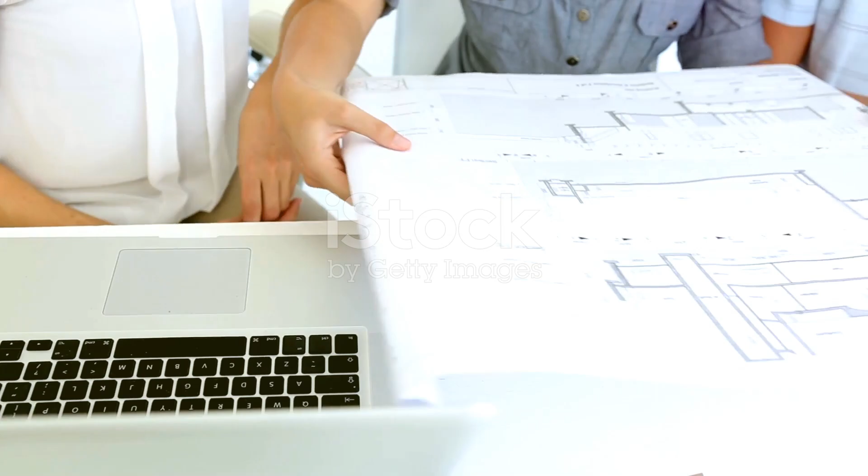Architecture is more than just constructing buildings. It is about shaping spaces that we live, work, and interact with every day. At the heart of this creative process lies the concept of form. Form refers to the shape, volume, and mass of a building, defining its visual presence and influencing how we perceive and experience the space. Architects mold and manipulate form to create buildings that are not only aesthetically pleasing but also

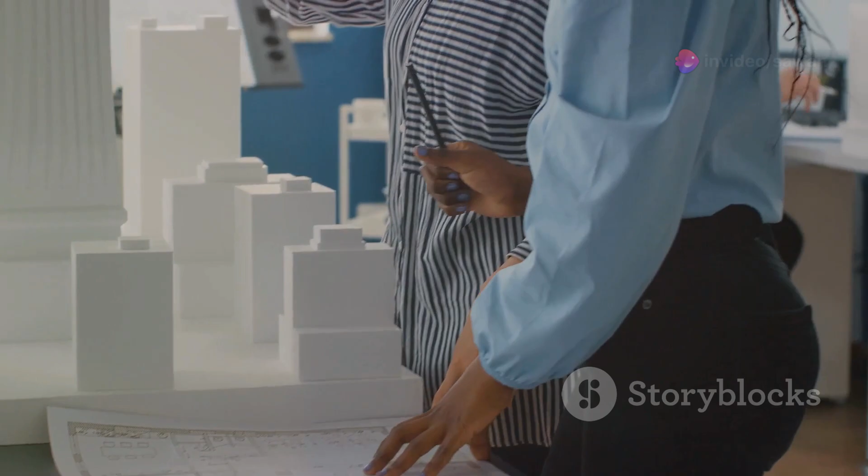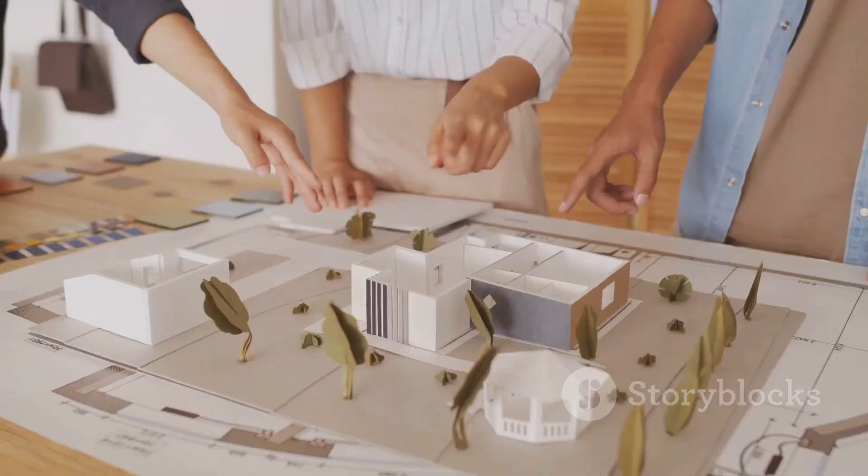functional and meaningful. From the soaring arches of Gothic cathedrals to the sleek curves of modern skyscrapers, form plays a crucial role in shaping our built environment. It can evoke emotions, convey ideas, and even challenge our perceptions of space. Think about the awe-inspiring presence of a grand mosque or the sense of tranquility you feel within a Japanese rock garden. These experiences are all influenced by the skillful manipulation of form by architects and designers.

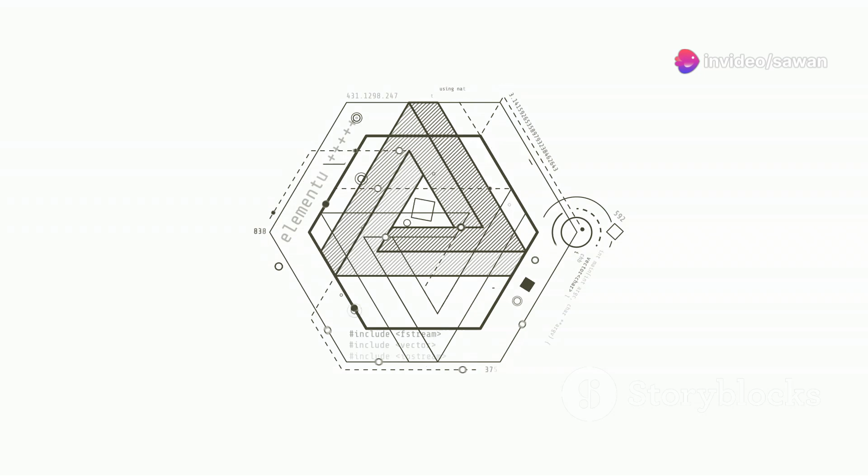Understanding the principles of form is essential for anyone interested in architecture. It allows us to appreciate the thought and intention behind the buildings we encounter. By exploring the different geometric shapes, transformations, and design techniques that architects employ, we gain a deeper understanding of the language of architecture and how it shapes our world.

This journey into the world of architectural form will unravel the secrets behind iconic structures and inspire us to look at our built environment with a fresh perspective. Let's delve into the fundamental elements that form the foundation of architectural design.

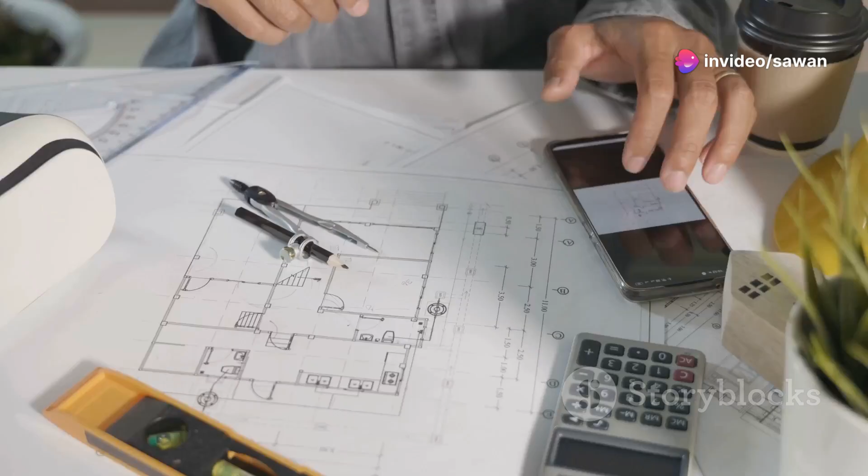Just as a sculptor starts with a block of clay, architects begin with basic geometric forms. These simple shapes serve as the foundation for more complex designs, providing a framework for creativity and structural integrity. By understanding the properties of these forms, architects can manipulate them to create a wide range of architectural styles and expressions.

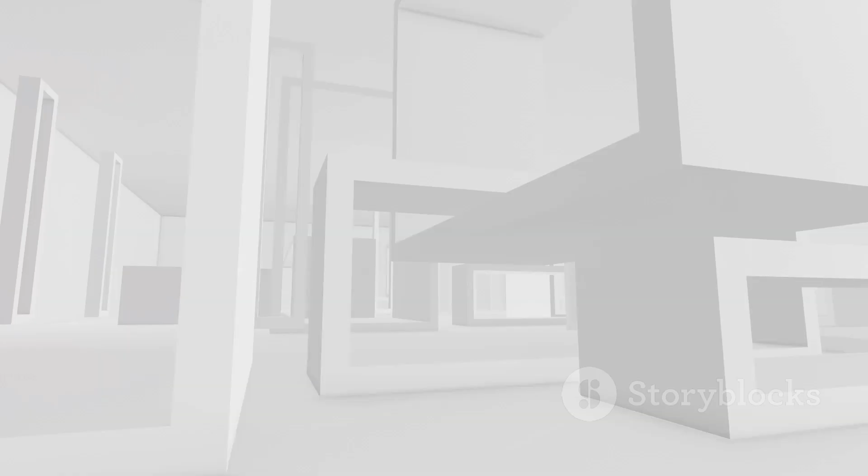The cube, with its 6 equal sides and a sense of stability, is often used to convey strength and simplicity. Think of the minimalist homes with their clean lines and open spaces, or the imposing presence of ancient Egyptian temples. The sphere, on the other hand, represents unity and completeness. Its curved surface is often used to create a sense of harmony and flow, as seen in the geodesic domes of Buckminster Fuller or the Pantheon in Rome.

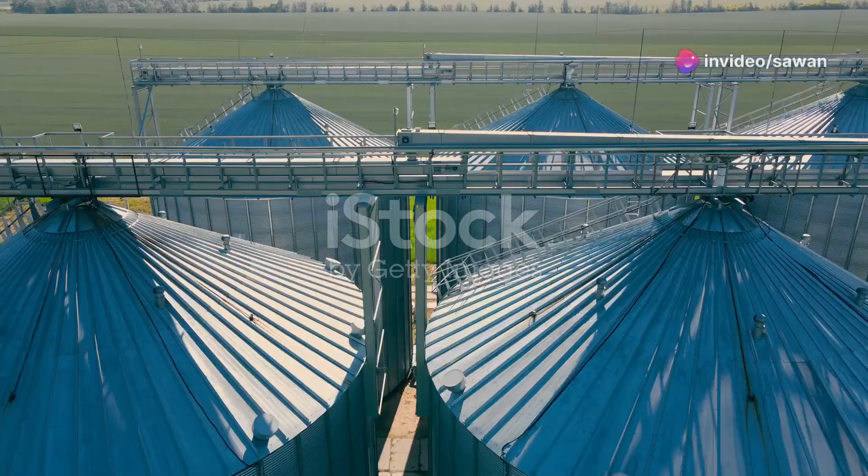Moving on to forms with more dynamic qualities, we have the cylinder and the cone. The cylinder, with its circular base and vertical sides, is often used to create a sense of verticality and movement. Think of the towering silos in industrial areas or the columns that grace classical buildings. The cone, with its sloping sides converging to a point, is often associated with direction and focus. The iconic shape of a teepee or the spire of a church steeple immediately draws the eye upwards.

Finally, we have the pyramid and the prism. The pyramid, with its triangular faces converging to a point, evokes a sense of grandeur and monumentality as seen in the ancient pyramids of Egypt and Mexico. The prism, with its 2 identical bases and rectangular sides, offers a versatile form that can be elongated, rotated, or combined to create dynamic and complex designs.

These basic geometric forms provide the building blocks for more elaborate designs. Architects skillfully combine, transform, and manipulate these forms to create structures that are both functional and visually compelling. In the following sections, we'll explore the various techniques architects employ to breathe life and character into these fundamental forms.

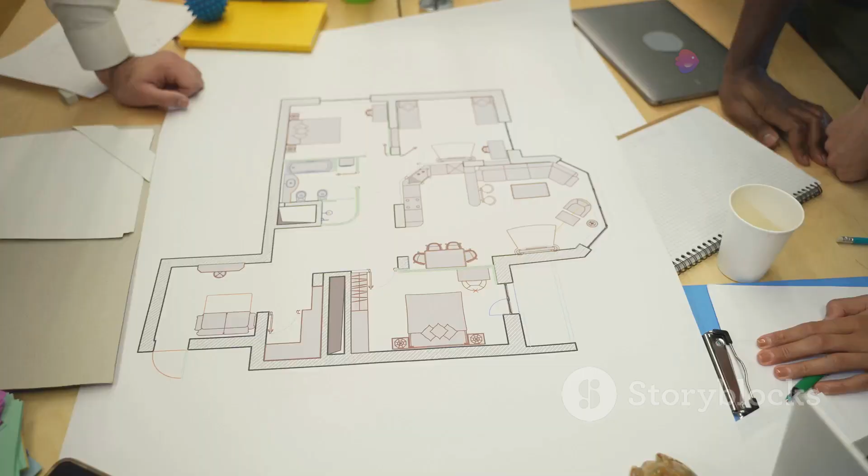Architects rarely use basic geometric forms in their raw state. Instead, they employ a range of transformations to create more complex and interesting designs. One of the most fundamental techniques is additive transformation, which involves adding elements to an existing form. This can be done in several ways, each resulting in a unique architectural expression.

One common approach is linear addition. This involves adding forms along a straight line, creating a sense of direction and movement. Think of a row of terraced houses or a skyscraper with repeating floors. Each element adds to the overall composition, creating a rhythm and flow that guides the eye.

Radial addition, on the other hand, involves adding forms around a central point. This technique is often used to create a sense of expansion and dynamism. Think of the Guggenheim Museum in New York, where a spiral ramp winds its way around a central atrium. The radial arrangement of the galleries creates a unique spatial experience as visitors ascend through the building.

Clustered addition offers another approach to additive transformation. This technique involves grouping similar or different forms together to create a more complex and organic whole.

Think of a traditional village where houses are clustered around a central square, or a modern university campus where buildings are arranged in a more organic and interconnected way. Additive transformations allow architects to create dynamic and engaging spaces by combining simple forms into more complex compositions. By carefully considering the arrangement and relationship between different elements, architects can manipulate the flow of space, create visual interest, and evoke a range of emotions in the observer.

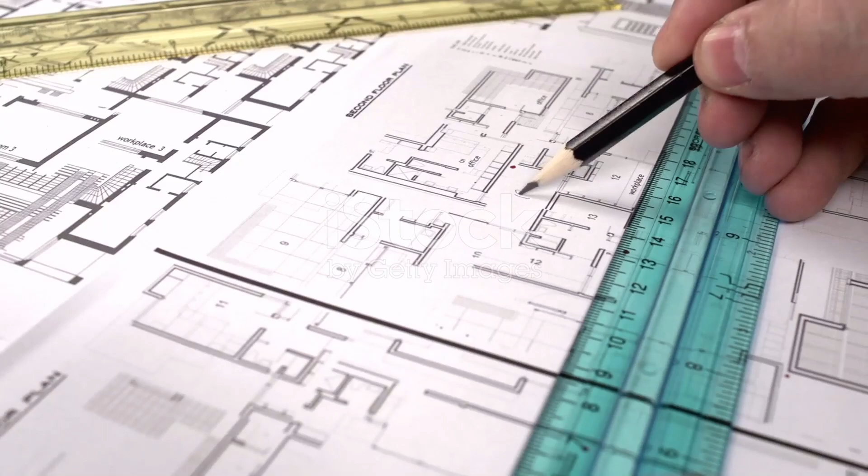Section 4: an in-depth look at dimensional transformations, stretching, compressing, or expanding forms. Dimensional transformation is another powerful tool in the architect's arsenal. This technique involves manipulating the dimensions of a form, stretching, compressing, or expanding it to create new and exciting shapes. By playing with the height, width, and depth of a building, architects can challenge our perceptions of space and create a sense of drama and intrigue.

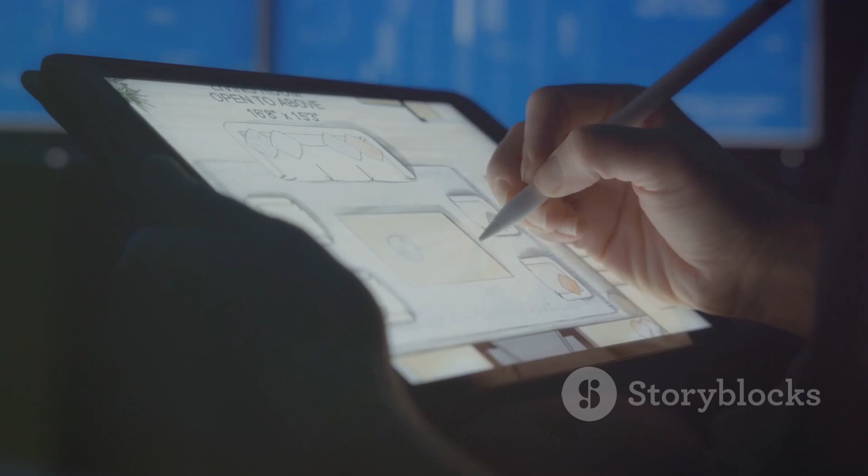Stretching a form involves elongating one or more of its dimensions. This can create a sense of elegance and verticality, as seen in the soaring skyscrapers of Manhattan or the slender columns of a Gothic cathedral. The emphasis on height draws the eye upwards, creating a sense of awe and grandeur.

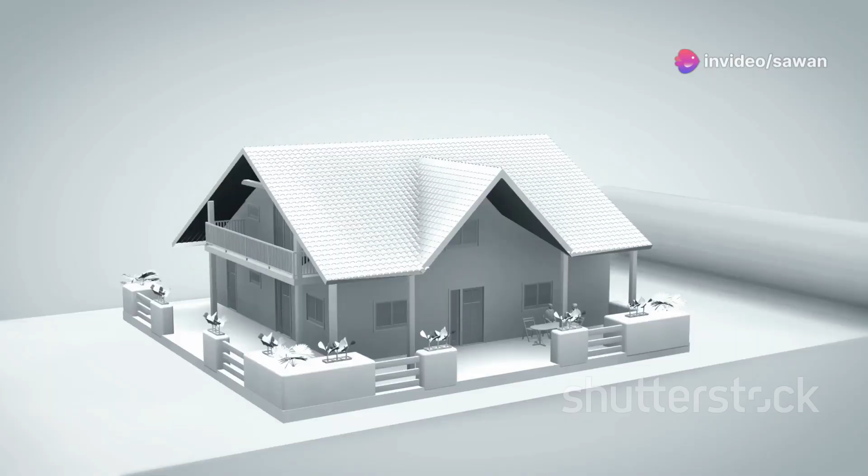Compression, on the other hand, involves squeezing or shortening a form. This can create a sense of intimacy or solidity, depending on the context. Think of a cozy cabin nestled in the woods, or a fortress with its thick walls and compact design. The compressed form conveys a sense of strength and security.

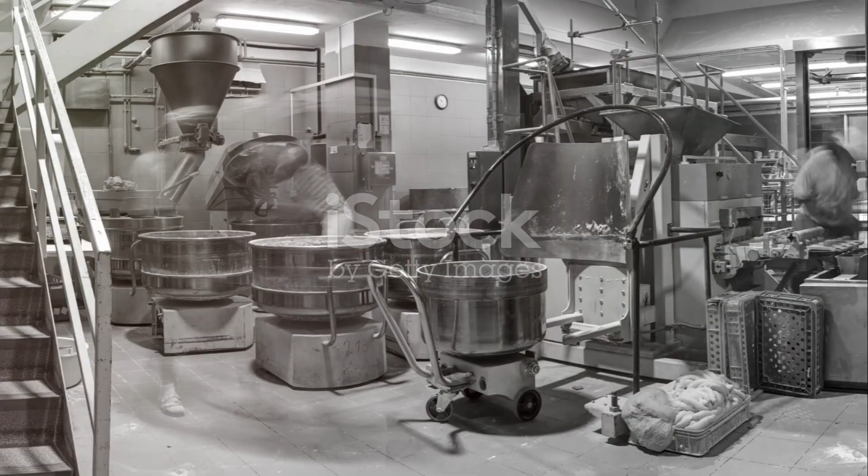Expanding a form involves enlarging it in all dimensions. This can create a sense of openness and grandeur, as seen in the vast atriums of modern shopping malls or the expansive halls of grand palaces. The expanded space invites exploration and creates a sense of freedom and possibility.

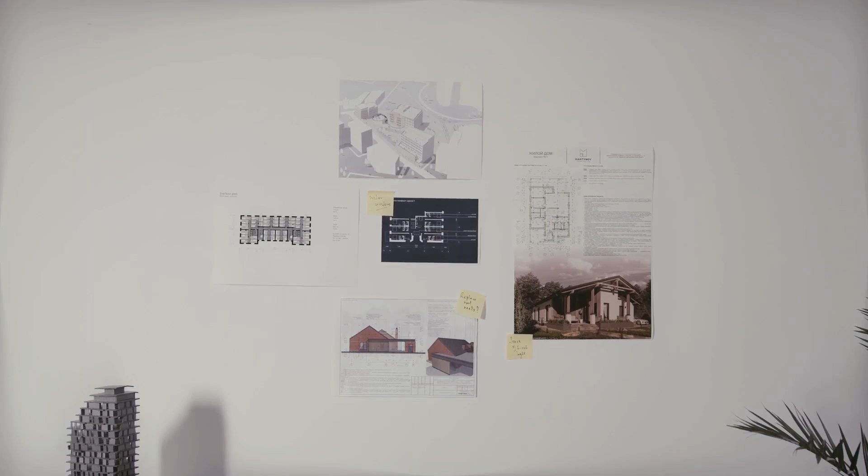Dimensional transformations allow architects to play with our perception of scale and proportion. By exaggerating or minimizing certain dimensions, they can create buildings that stand out from their surroundings and leave a lasting impression on the observer. This exploration of dimensional transformation demonstrates the importance of understanding how manipulating basic forms can dramatically alter the character and impact of a building. It highlights how architects are not limited by the constraints of simple shapes, but rather embrace them as starting points for creative exploration.

Section 5: explanation of subtractive transformations. Carving, hollowing out, or creating voids. While additive and dimensional transformations involve adding to or altering the size of a form, subtractive transformation focuses on removing portions of a form to create something new. This technique, often described as carving or hollowing out, allows architects to introduce light, create interesting spaces, and add a layer of complexity to their designs.

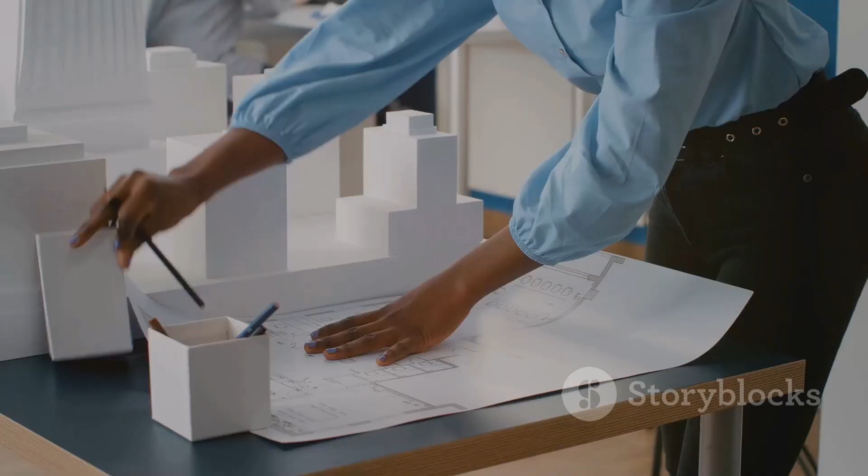Imagine a block of stone transformed into an intricate sculpture. The artist carefully chips away at the material, removing excess stone to reveal the form hidden within. Similarly, architects use subtractive transformations to shape buildings, creating openings for windows, doors, courtyards, and atriums. These voids, far from being empty spaces, become integral parts of the design. They introduce natural light deep within the building, creating a sense of openness and connection to the outdoors. They can also frame views, direct movement, and create a sense of drama and surprise.

Consider the Pantheon in Rome, a masterpiece of Roman architecture. Its iconic dome features a central oculus, a large circular opening at the apex. This void not only floods the interior with light, but also serves as a symbolic connection to the heavens.

Subtractive transformations allow architects to move beyond solid masses and create buildings that interact with their surroundings in dynamic ways. By carefully considering the placement and size of voids, architects can manipulate light, create a sense of openness, and add a layer of artistry to their designs. It's about finding beauty in the interplay of solid and void, light and shadow.